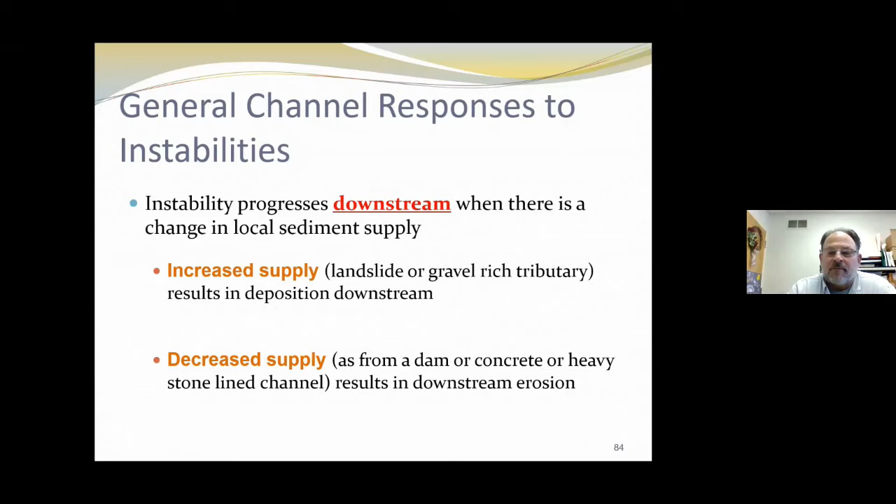We have the Tioga River that comes out of Pennsylvania and runs north to the city of Corning, and that stream, after a major rainstorm, runs at the top of bank for days after the heavy rains, because the dam's releasing it and won't release it high enough to go into the floodplain. So what happens with that extra flow for that many days, it saturates the banks, it picks up sediment because it's trying to slow down from the high water level, and it just creates a problem because it needs that sediment supply to slow itself down and create its channel.

So instability progresses upstream where there's a change in local channel or channel form. We're going to talk about incised channels, which result in stream bed erosion and upstream head cutting. That's basically if that dredging situation that Mike showed you is done in a stream, the stream has to react to that. It has to create a head cut to pick up material to bring down into that excavation area so that the channel can regrade itself, destabilizing itself. That's an incised channel. It can't reach its floodplain.

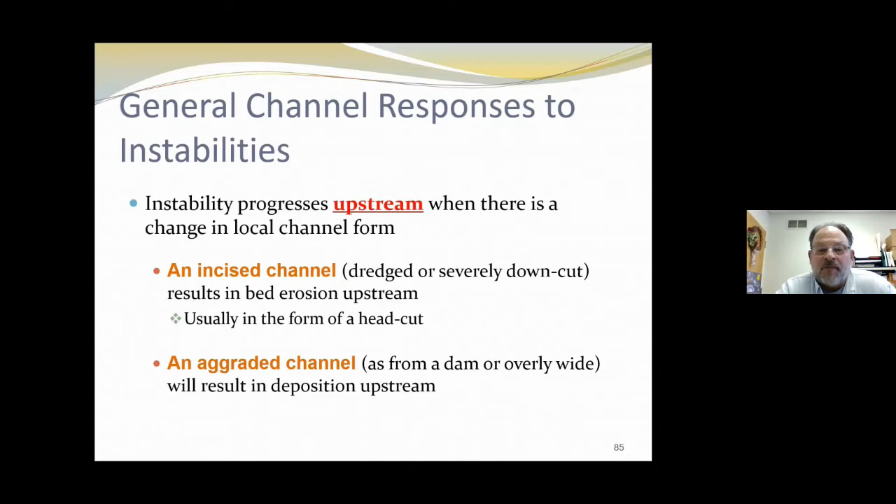An aggraded channel is from a dam, or over-widening will result in deposition upstream. So it's just about the opposite.

Incised channels: streams that cannot access their floodplain at bank full are said to be incised. That means that at their bank full depth elevation, they can't get out into a floodplain any longer. Therefore, their velocities and erosiveness are increased, much more so during a flooding event, which creates more instability on the channel itself because of the incision and the fact that it cannot access its bank full floodplain. So incised streams then are almost always unstable and very difficult to stabilize.

Yep, Jeff, if you don't mind me jumping in here - go right ahead, Mike. We need to look at the type of stream we're observing when we go in to evaluate it, because different streams engage their floodplain differently. So again, we need to take that into consideration when we're looking at incision.

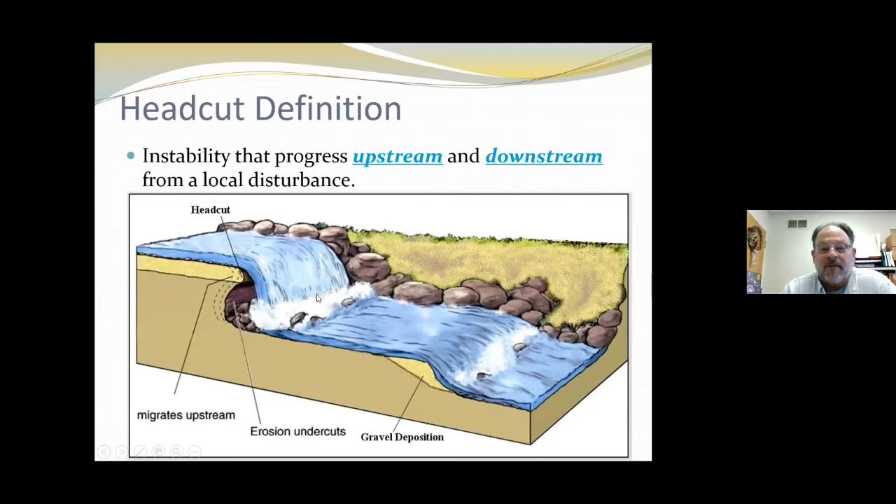Head cut definition: that's instability that progresses upstream, and downstream is where you get the deposition occurring. Generally it's from a local disturbance, either natural or man-made. You can see in the slide, we get the gravel deposition downstream. We're getting the stream head cutting as it migrates upstream, picking up that material and depositing it downstream.

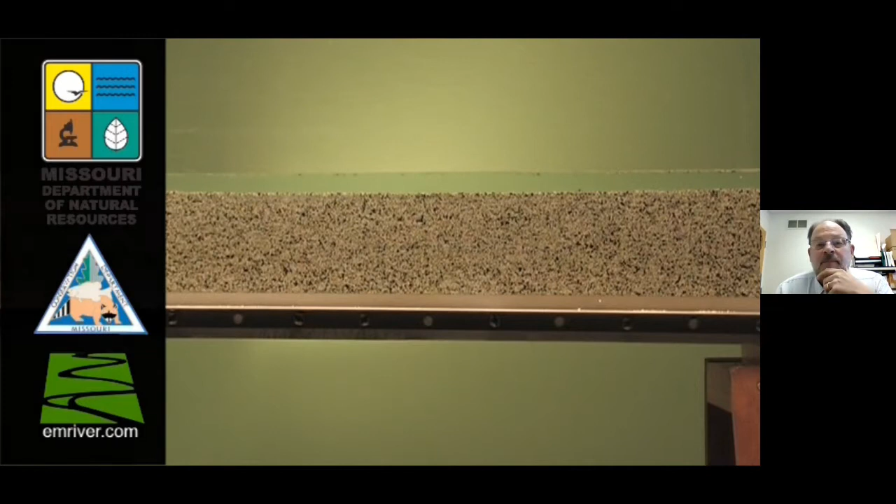So we have a stream table video of a head cut. You can see that this table's set up so that we have it on a slope and the water's flowing in this direction. And if we have some activity occur downstream, you can see how the profile begins to change as it picks up material, trying to fill that hole in. The stream tries to regrade itself, head cutting and filling, head cutting and filling.

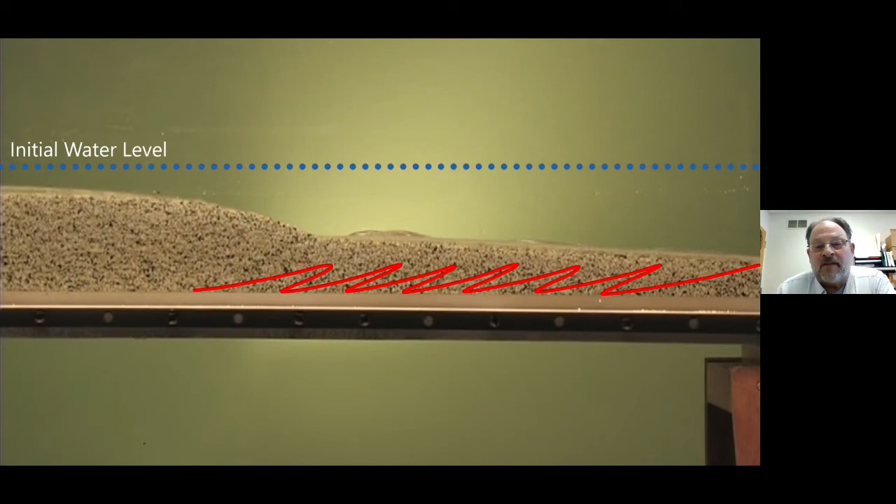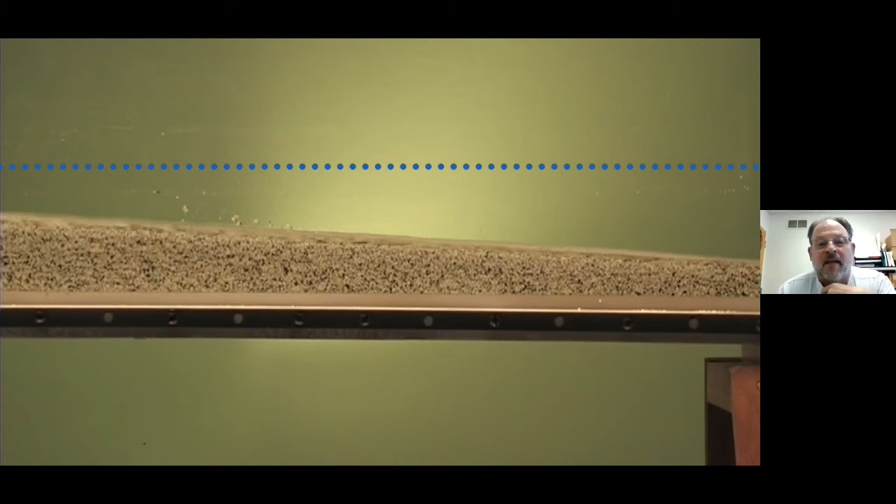So that's the profile, but as that stream head cuts and refills itself downstream, not only is the bed of the stream being affected, but these banks are also being affected. They're caving in because of the drop in elevation.

When you're working with avulsions, there's no need to go in there and do anything immediately, like dig it out or dredge it out, if there is no property or infrastructure that is in danger. The note here says we need to notify the municipality or the local soil and water district that there's an avulsion there, so we can make the proper decision on how to handle it.

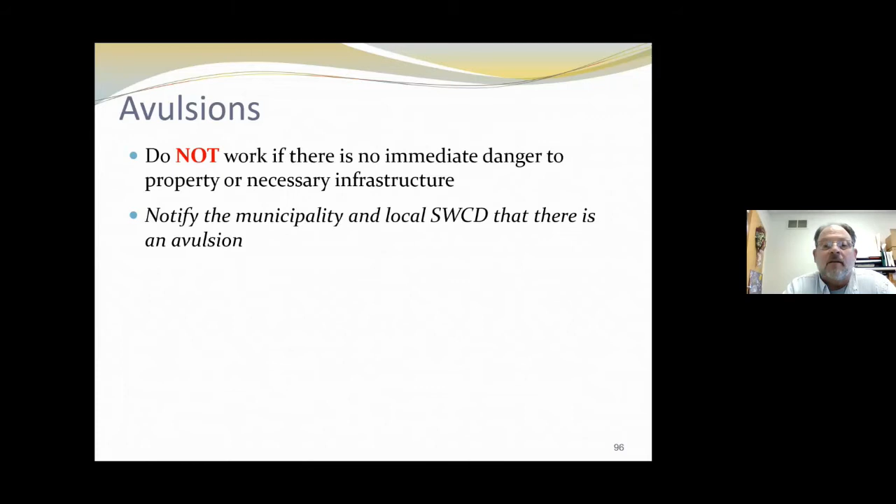So we do work on avulsions if the property or infrastructure is in danger. We're asking soil and water or the New York State DEC office for assistance. If the repairs have to be made immediately, we're bringing the new bank up to the same elevation as the existing ground, so the channel can access the floodplain in the future. We don't want to get it so deep that we're creating an incision again.

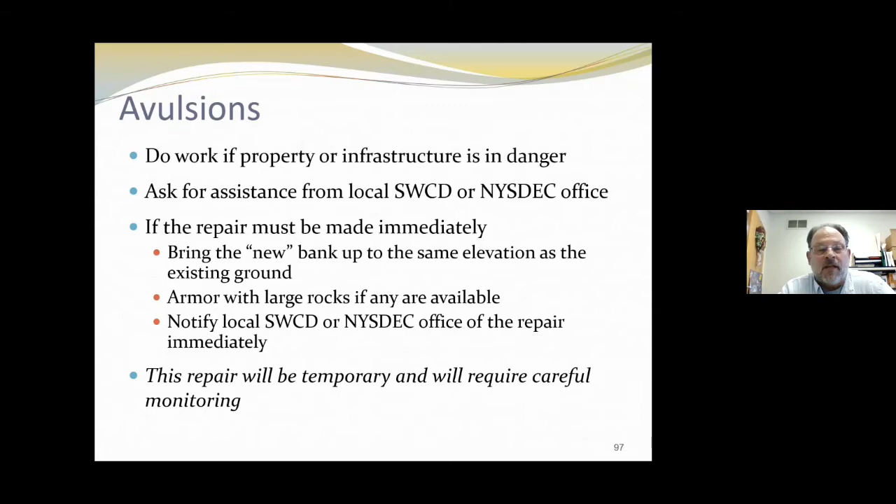Armor it with large rocks if some are available. Again, notify the DEC or soil and water conservation districts of repairs immediately. Generally speaking, those types of repairs are going to have to be monitored so that we can make a decision on how to stabilize that area in the future, or whether there should be a change in that project.

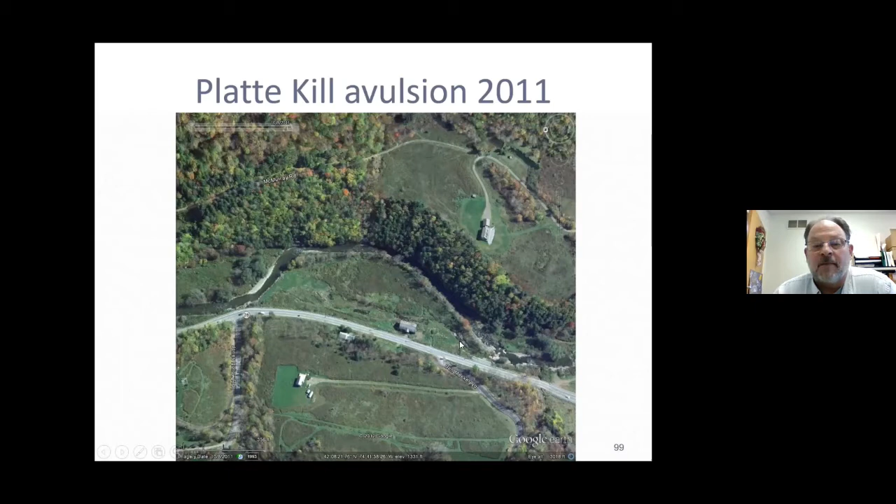And this is what they did. Notice it's 2011, so this is a couple years after the issue was created. A plan was put together where they blocked off the new channel that was developed by the avulsion, cleaned the avulsion out, and basically let it run down through the original channel. So they protected the barn, the road, and they stopped the erosion or head cut that might have been coming up this valley.

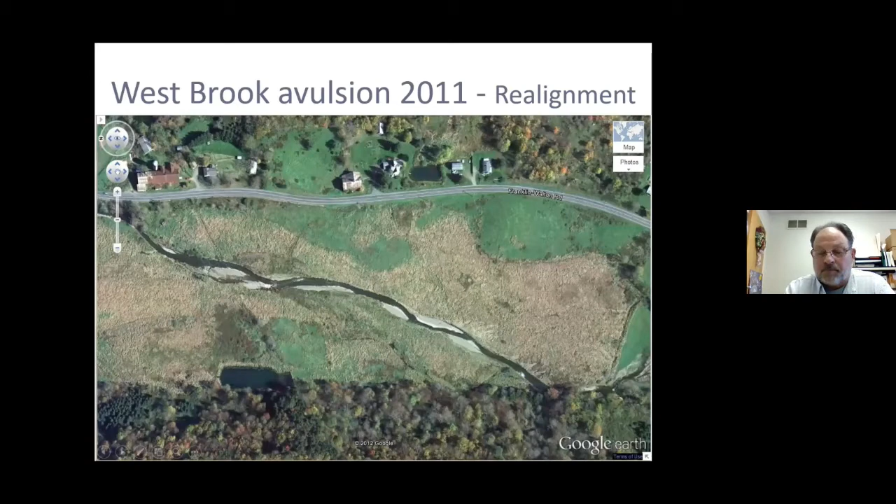Okay, we're going to move into flood response. Basically, this is the emergency stream intervention program. A lot of this program came out of flood responses in the past, where contractors and municipalities were rushing into projects without really knowing what to do with the channel or how to handle it, or just going in and wholesale cleaning some areas. This program is assisting in coming up with a new process to deal with such situations in the future.

So when we have a flood response, we need to prioritize the items that we need to address. We figure out the higher priority stuff, the higher priority damages, do an assessment, and go in and do a repair and document whatever is needed in the future for repairs. During an emergency, we're just trying to do the immediate stuff first, the stuff where facilities, infrastructure, roads, bridges, or culverts could allow or prevent the loss of life and protect the general public. That's what we're looking at immediately when we get into the first flood response.

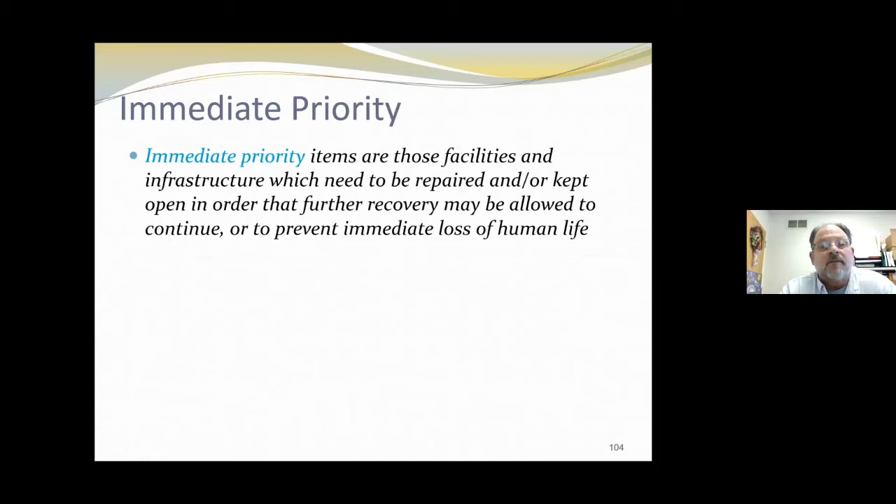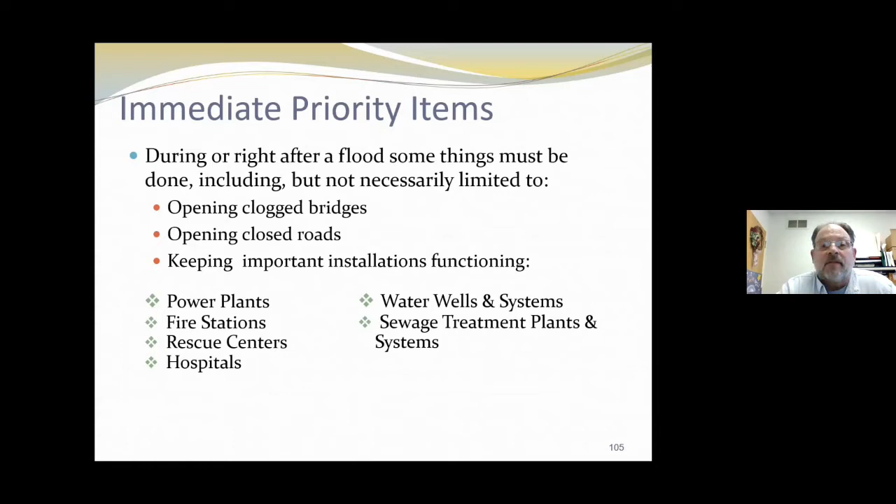So right after a flood, what do we need to do? We certainly need to open up clogged bridges, open closed roads. We need to keep important installations functioning, such as power systems, power plants, fire stations, hospitals, water well systems, sewage treatment plants, and that sort of thing. So those are more of the high priority items that we need to look at.

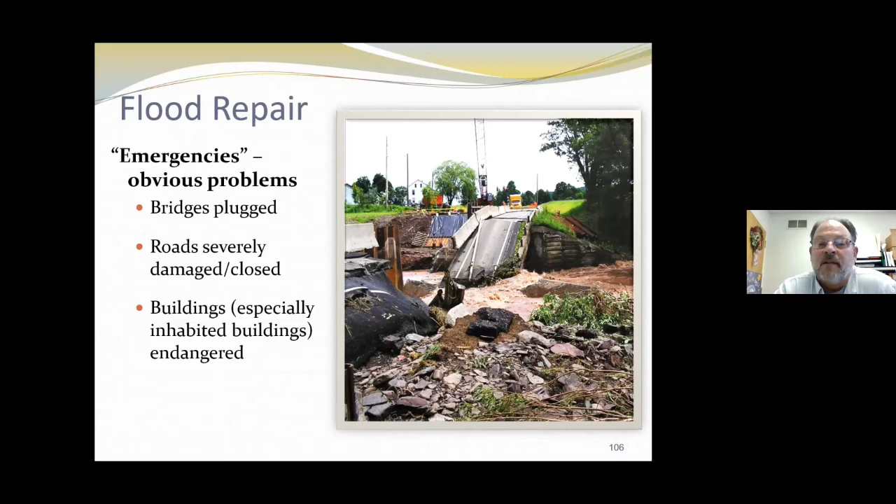For example, here, this is an emergency observation. This bridge has pretty much been decimated by the flood, probably plugged with debris, and water ran over the road and washed out the entire structure. So this structure is going to take a little bit more design and more effort to get the road back open again. In an emergency situation, this is where you're looking at emergency action right away, to get road closures done, so you can come up with a plan on how to address the future repairs of this site. So, high priority items are necessary for the first part of the cleanup process.

Like I said, this course concentrates on getting channels back into some acceptable condition, something we can live with, something that doesn't damage the stream system both upstream and downstream. We just need to open up those clogged channels from debris and that sort of thing. We need to get those channels back into place, stabilize the active eroding stream banks, and see if we need to work on stabilizing any landslides that occurred. We need to get the channel to a condition so that the natural processes of stream morphology can begin to return it to its natural state.

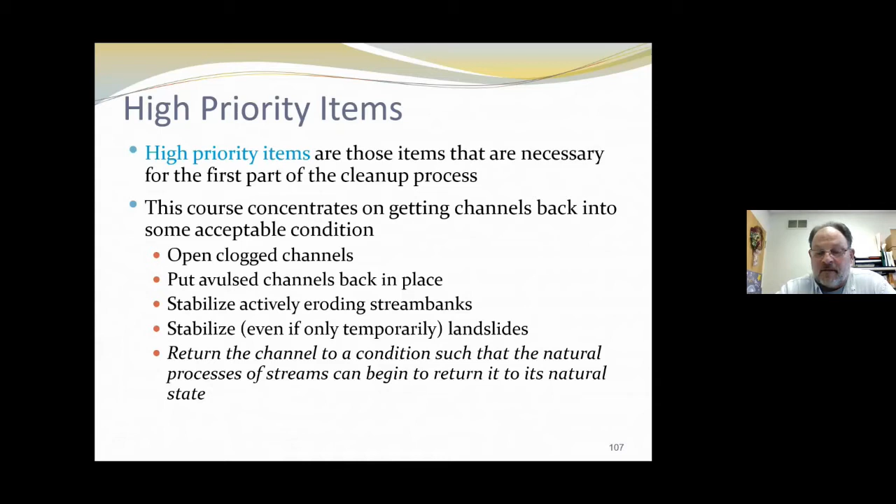We don't want to over excavate, we don't want to over dredge. We want to do it in a means where we can allow that stream to heal itself up in the future.

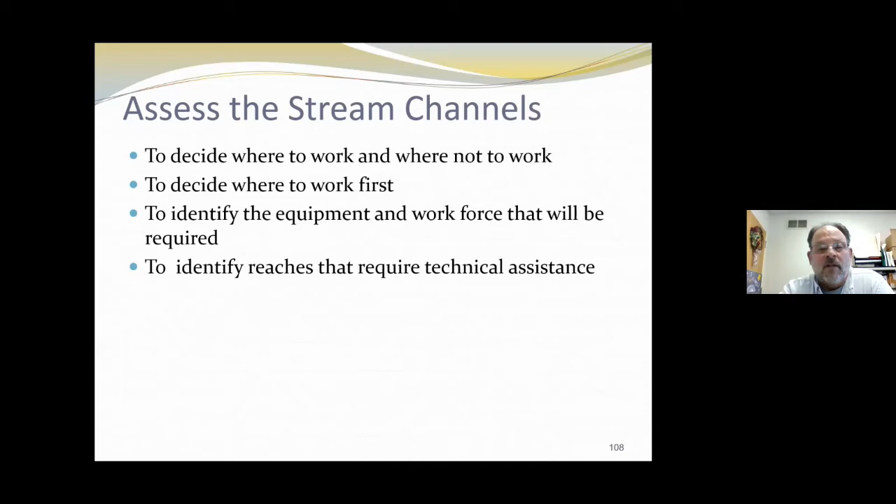So, we need to assess stream channels. We need to decide where we're going to work first, what we're going to do. We need to figure out the equipment or workforce needed to get that project done. And we need to identify reaches that are going to require some technical assistance, either through the Soil and Water Conservation Districts, DEC, or some other agency.

So we need to work on actively eroding high banks, eroded banks that are heading towards infrastructure or homes. We need to look at areas with high sedimentation load, where other small floods might cause an issue or make the bank even worse or impact infrastructure. Basically, channel blockages, debris at culverts, revetment, undermining, and impaired channel capacity, so that a lesser stream flow during a flooding issue would be worse.

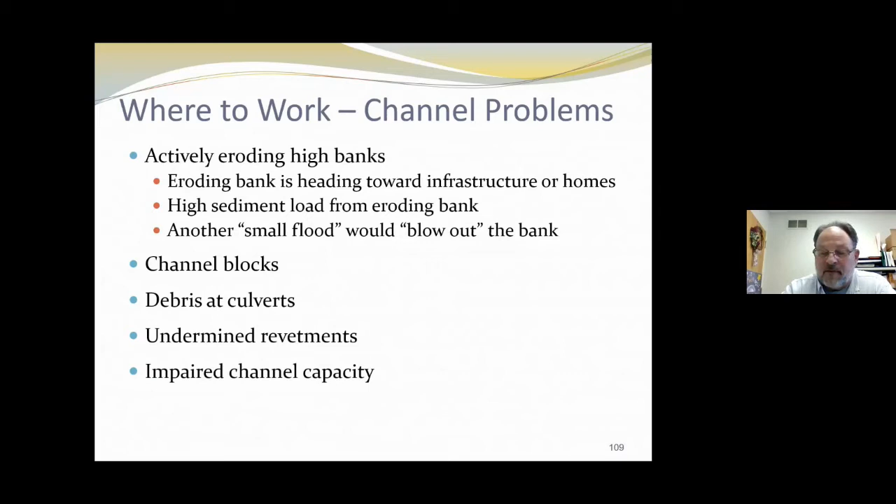So here's a slide showing an actively eroding bank. If we have a bank that's close to a garage but there doesn't seem to be any... I'm not sure where the house is, probably downstream past that tree we see on the right. But is there immediate danger of this creating damage to infrastructure or life and limb?

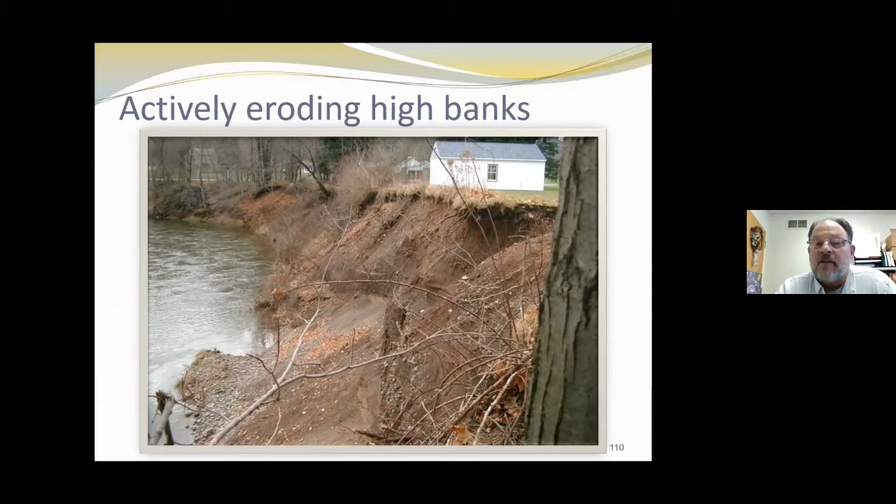By the looks of the size of that stream system and the type of material in that bank, it's probably an active eroding area, and it needs to be addressed. But I think this one's going to take more time than just going in and opening up a channel or taking out a clog or debris jam. This one's going to take some design work and serious calculations, and it's going to cost some money to repair.

Channel blockages. This is a good example of a debris jam that has created a deposition load just upstream. This could definitely cause problems and reroute this stream if the deposition isn't removed in a timely manner.

And we have to remember that when we go in to do these things, we have to try to get that channel back to some sort of stable slope. We have to take some survey information to figure out where we need to excavate to, and not get overzealous with it. But sometimes these areas will actually heal themselves up if you just get the debris out of the way.

Jeff, if you don't mind me jumping in here, on a site like this, one of the things you want to consider is all that sediment behind that blockage we see in the channel. Sometimes what's going to happen, what we need to consider, is if we remove that woody blockage, all that sediment flows downstream and causes problems downstream.

The other thing you might want to consider is sometimes that woody blockage is an enhancement, because it starts to address the incision of that channel. It starts to block sediment up, so the channel above that blockage is re-engaged with the floodplain. So you need to look at some of these situations carefully, and not just jump in there and start ripping and tearing just because you think it needs to be done.

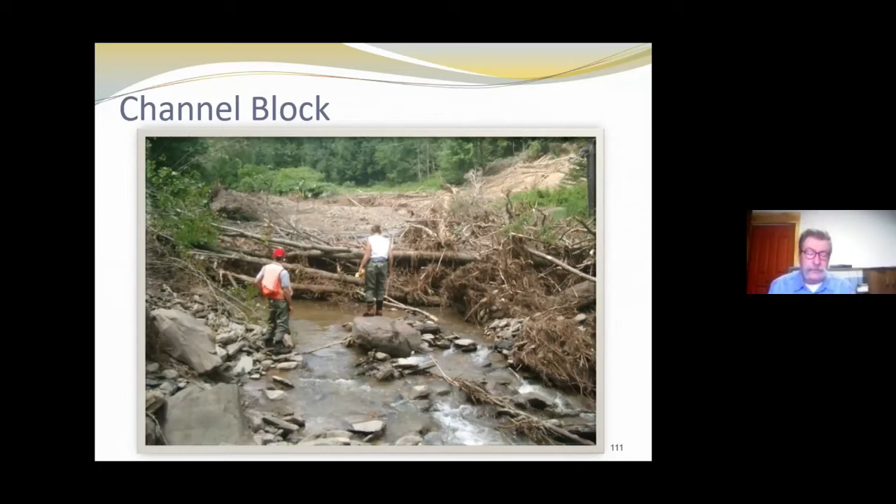Debris at culverts. There's a scenario of a plugged culvert with debris. We've got some issues there, with the town road. We've got quite a bit of damage to the infrastructure. So we're going to get this channel opened up so we can get the flows going through again. This is definitely an area that's probably a high priority for the township.

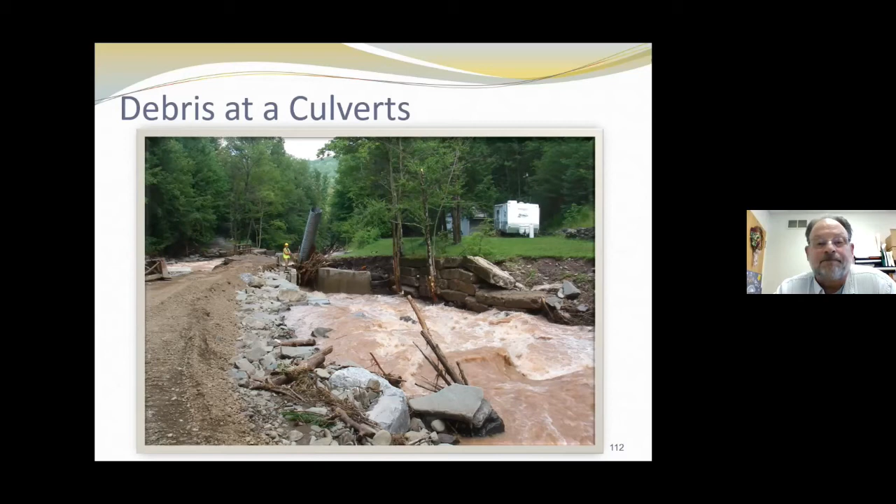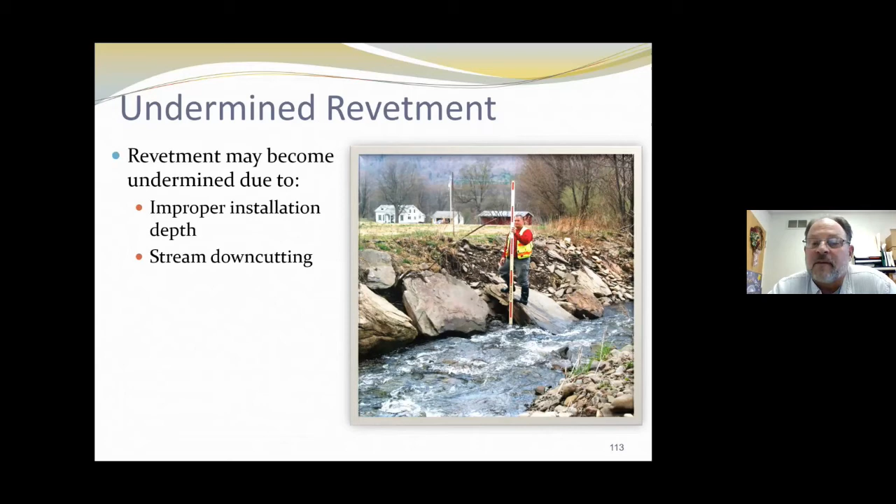Undermined revetments. This is an example of some riprap that was placed on the bank, and after the storm event, it evidently cut itself down deeper and undercut the toe of that stone, and it just slid down the bank a little bit. Whether or not this is an immediate emergency is to be seen, but this is some of the issues you have to document, because you will probably have to make repairs to something like this in the future.

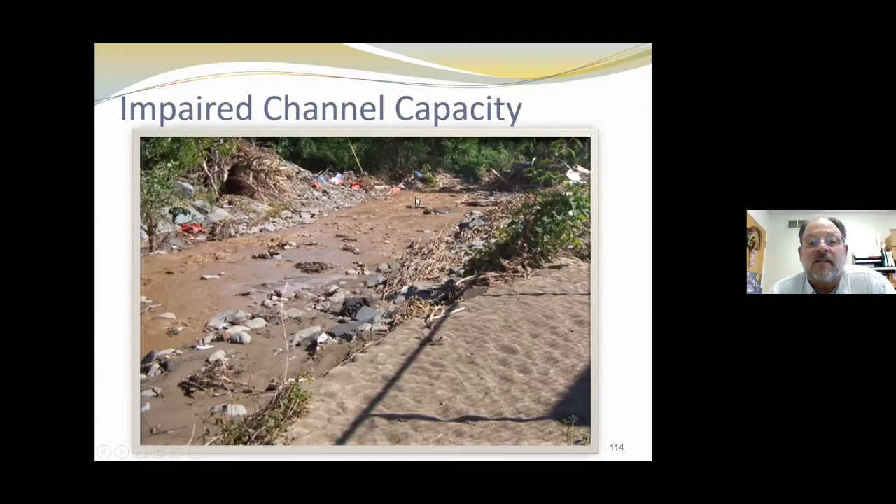Impaired channel, deposition in a channel. It looks like there was quite a bit of debris that got packed up in this channel and created deposition in this area, which basically filled the channel in, so that anytime we get a smaller storm event, this floodplain is going to be activated at a lesser storm, and it's going to create problems downstream. You can notice how this floodplain has collected quite a bit of fine material, so the velocities must have been quite low through here at the time of the flood. They just need to get the channel reconnected through that reach.

So where not to work? Okay, the channel's dimensions seem to be okay, and there's little damage around. We don't need to be messing around with that. If the banks are relatively stable, we don't need to be putting that on a high priority list.

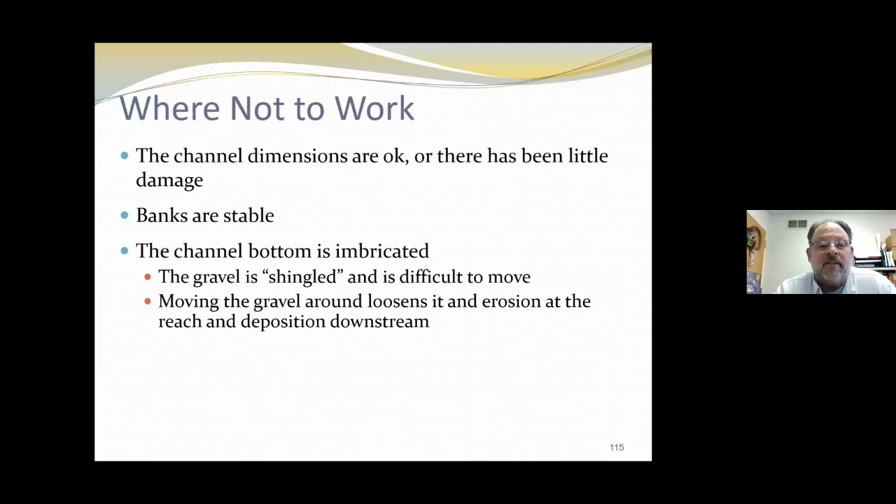If the channel bottom's imbricated - imbrication is the nature's way of packing the gravel in a shingled manner - it's probably very, very little erosive, because it's packed in there by Mother Nature. It takes a lot of energy to move that. Once we start moving that around, we loosen up that natural imbrication, and then that material will mobilize itself at a much quicker or lesser velocity rate. It'll mobilize. Here's a photo showing after a storm event how that material is laid in there by Mother Nature.

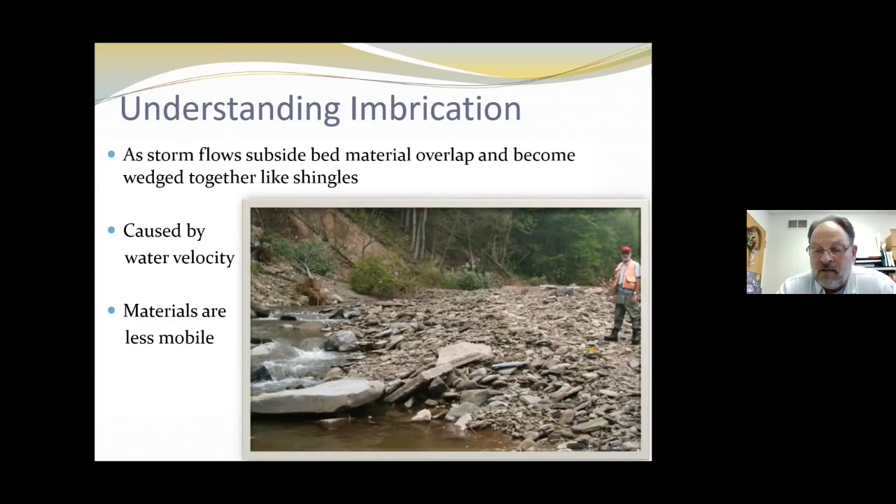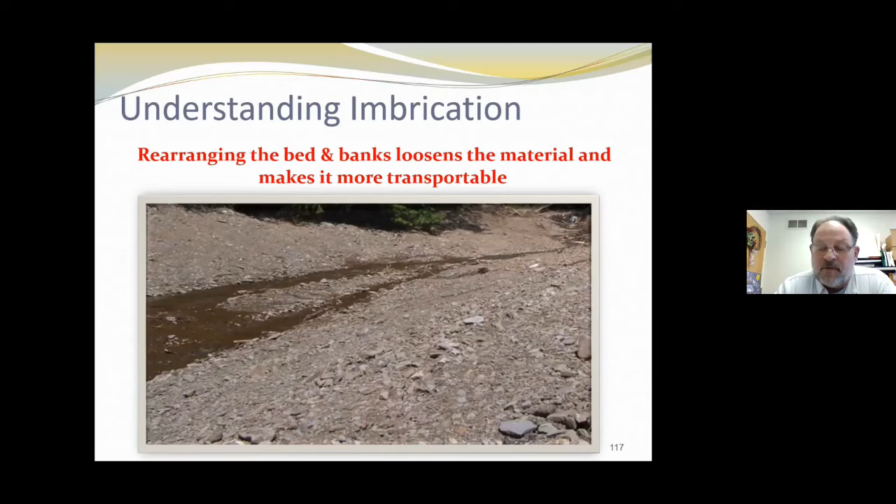That's caused by the velocity of the water, and the stones, as you can see, are wedged together like shingles. Basically that material in that channel right now is less mobile than you could make with any construction or using any equipment in. So once we rearrange the bed and banks, we loosen that material up. All that shingled larger stone that was on the surface has kind of disappeared, and the fines have come up into it. This material is much more transportable than before, when it was all imbricated by Mother Nature.

Caution has to be used on those steep streams. Slopes over 4% - the stream's probably one of those step pool systems we showed earlier, where the channel itself has steps in it, like mini natural check dams, to help stabilize itself. If we remove those areas, we're going to ask for trouble and definitely have some serious head cutting, and we could actually start destabilizing banks if we do the wrong thing on those steep streams.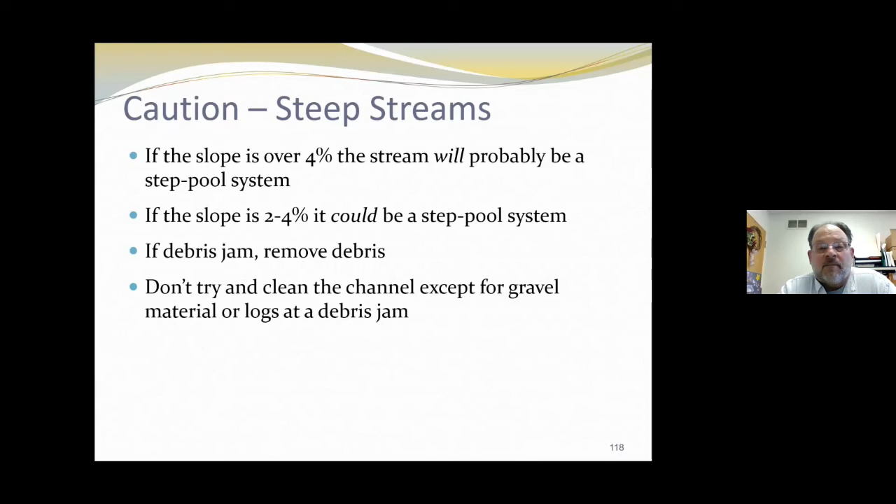If the slope's 2 to 4%, it could be a step pool type system, and we just need to know there's different ways of dealing with that stream system than with the pool riffle system. In this steep stream, if a debris jam is there, we just need to remove the debris jam, not the gravel or stones, unless we absolutely have to. Generally in those streams, you won't see a lot of gravel deposition unless it's a huge debris jam.

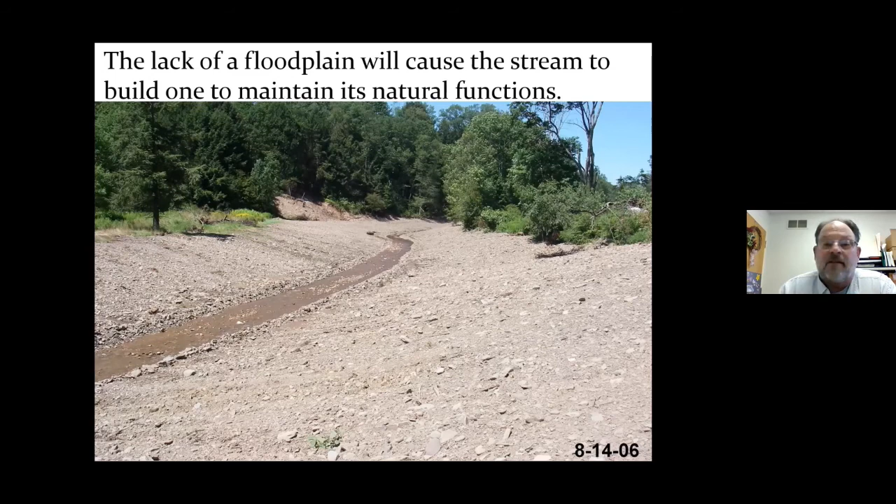So the lack of floodplain is going to cause a stream to build one to maintain its natural functions, and that's what it's doing. For two months after the work was done, you can see how the channel is beginning to meander, re-meander itself.

So you can see how the stream wants to get back over to where it was originally. There's where the toe of that landslide was, or failure. It's going to continue to move in that direction until it gets back to its natural meander pattern. This is only four months after the work was done.

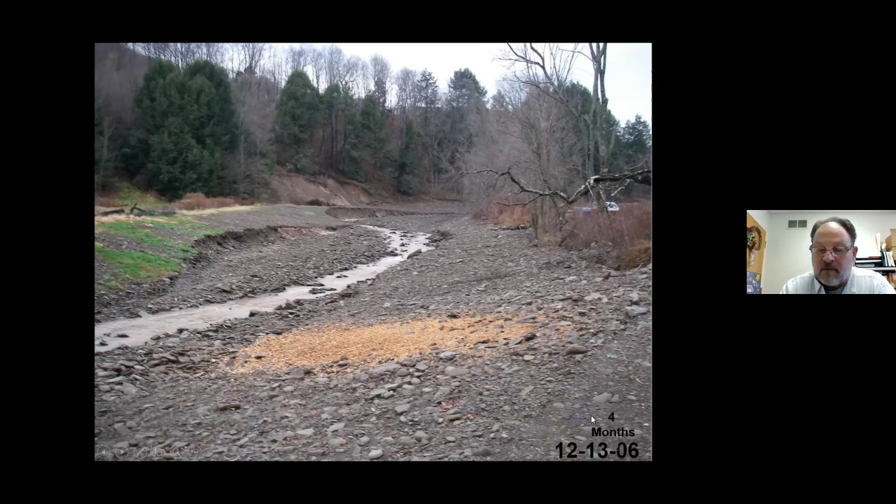So all that effort and work with all that bulldozing—really, if we had left it alone for a little longer, let's see what the channel would have done. We could have made some better decisions and made some efforts to do something a little different.

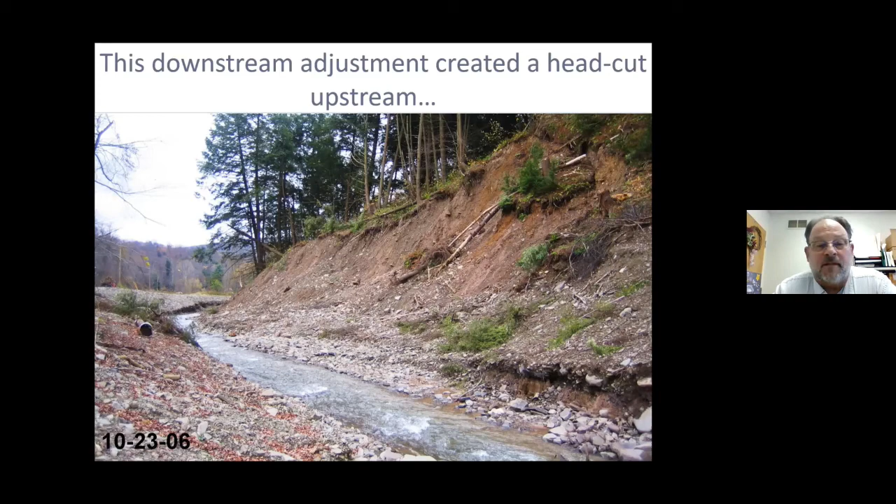So that was the downstream adjustment. According to this slide, it has made a head cut that came upstream. You can see how the head cut has been working its way up the channel, and that's going to destabilize these banks over here because it's probably getting deeper than it was originally. We just need to be very careful about slope on these streams when we're working in them.

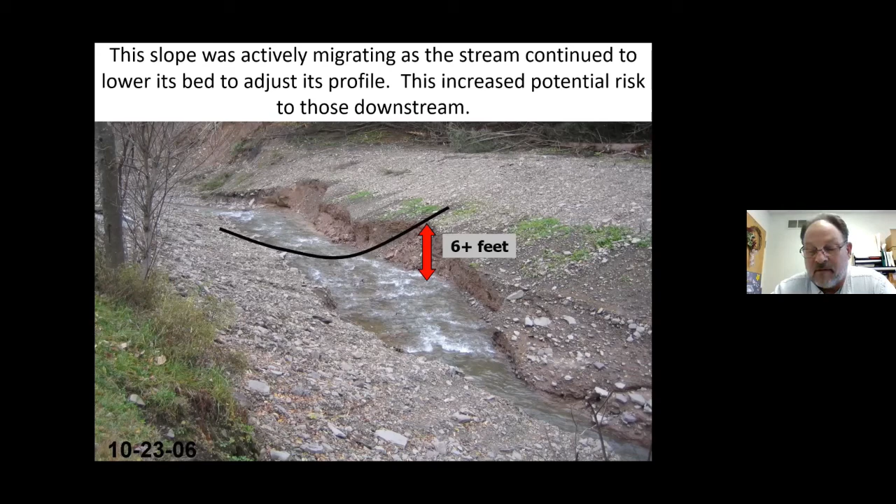So the stream continues to lower its bed so it can get back to a stable slope again, and you can see that we're looking at almost 6 feet of scour along the toe of this stream bank here from the activities we did from channel straightening downstream. This material, once it's mobilized and moves itself downstream, it actually probably is plugging culverts and bridges downstream or depositing somewhere downstream and causing problems.

So post-flood work—improper post-flood work—can negatively affect the stream function, the stream stability, of course the aquatic habitat, and that goes right along with the water quality. And it costs a lot of money for the local resources to keep going in and maintaining structures downstream that may be impacted from this activity. So that's something we need to look for.

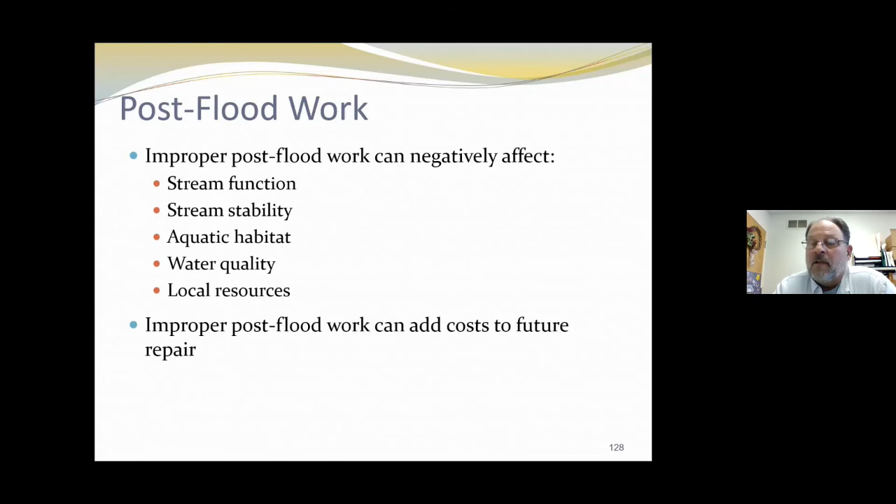And then we have to address the situation with, well, what do we do in the future? Do we need to do future repairs so that we can slow down the erosion now that we have to deal with? So it can get quite costly if we don't do the proper immediate flood work.

So an itemization sheet was developed by Delaware County Soil and Water Conservation District, and we have a training manual. We'll bring that slide up, basically to help us document the information from the field so that we can prioritize it when we get it back to the office or whatever.

We're using one sheet for each stream reach. We're checking off the problems, adding notes, doing a sketch. We can change this information if we need to, and for sure we need to take photos at all of these sites right directly after the emergency has occurred, because they're going to help us with the permitting.

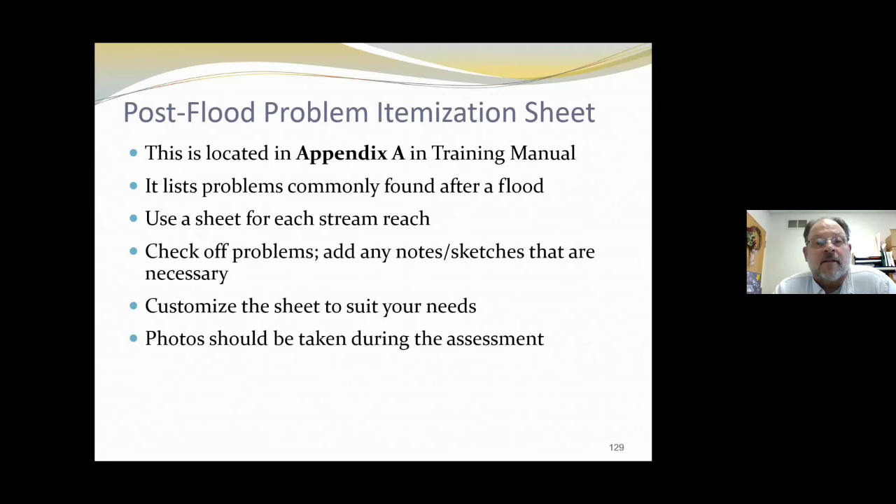They're going to help us make decisions on where to work, where not to work, that sort of thing. It'll assist the municipality greatly. So the advantages are we can identify the location, the number, the different types of problems that we have on each reach. It can help us decide which are the most severely impacted reaches so that we can make decisions on where to prioritize our work in the near future.

And then we can determine the manpower that's needed for the job, whether it's removing woody debris and we need chainsaws and laborers, and what type of equipment needs we need to have out there, whether it's excavators or front end loaders or trucks to haul debris away.

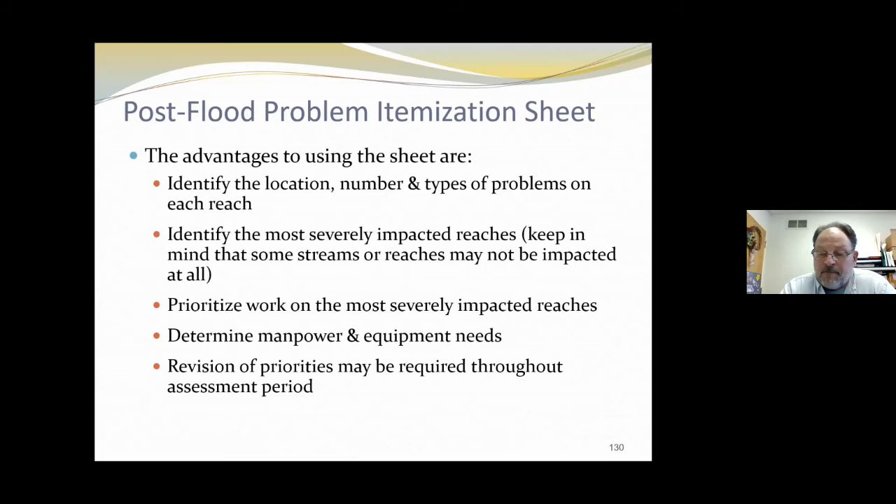We can always revise our priorities as we move through the assessment process. Again, these sheets can be saved as a record to document what work was done, just in case we're looking at maybe a FEMA disaster where we could be receiving state or federal reimbursements for some of the work that we had completed.

Generally, most of those disaster declarations do not occur for many weeks or even months after the disaster has occurred. That's why it's good to have this as a record. And you can document this stuff for permitting reasons too, for the permit applications if needed, or if it's an emergency permit, then you've got that documentation already established.

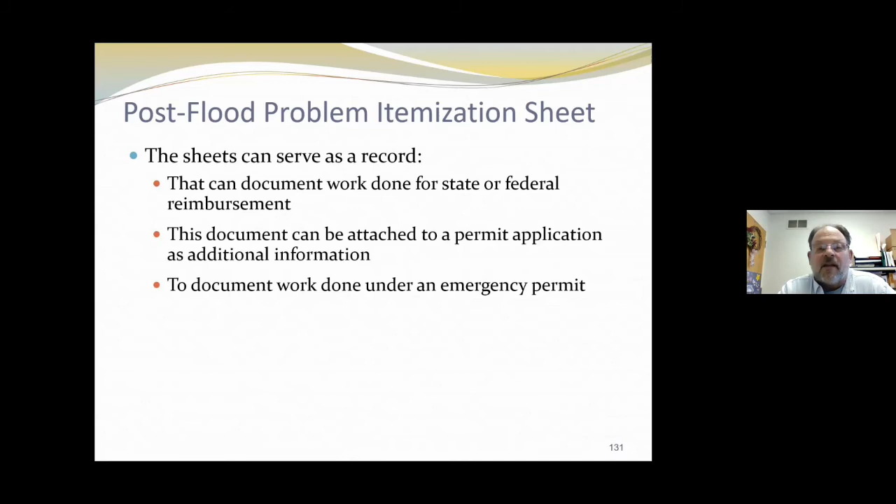Here's an example of the Platte Kill site that we looked at, the avulsion that occurred. They quickly put together a sketch plan of what they were going to do, and change the avulsion so that they could put it back in the old channel. They had debris at culverts, and they had scour at the culvert. They had a mass failure, avulsion. We know they had the avulsion that occurred. So all this stuff was documented.

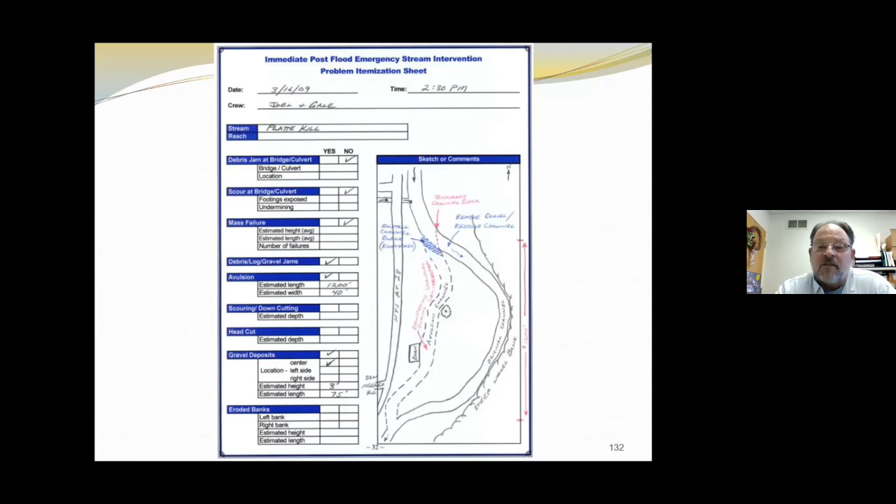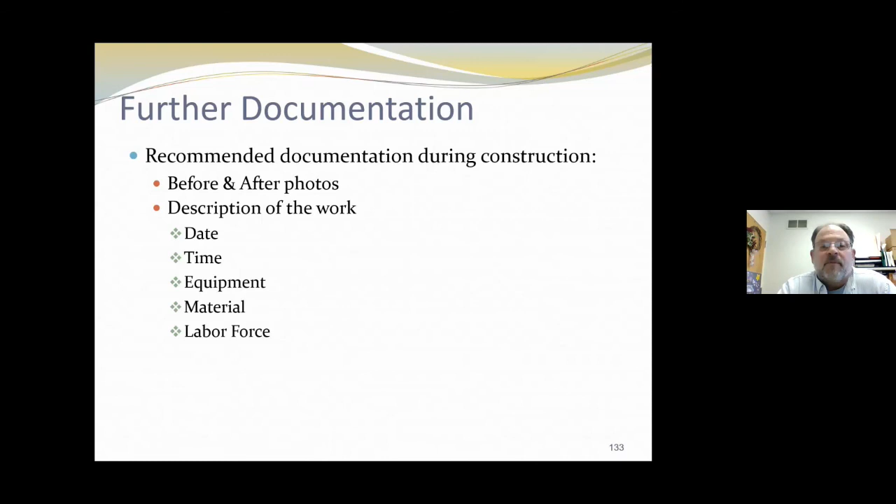Documented gravel deposits. They got an estimated height and length of what the deposition was in the sketch plan. So again, before and after photos, very important. Description of the work that was completed needs to be written up. Of course, you need to take time and write down the days you worked, the time you worked, the type of equipment, the material, your labor force. So all that stuff can be figured out for a cost in the future.

Post-construction review, we need to go back and look at it and see if the work was performed properly, especially if we had a permit involved, if it was completed, if it met the needs of the identified projects on the itemization sheets. And you can always contact the Soil and Water District and New York State DEC offices for assistance with future vegetation, structures, and long-term monitoring of those sites if need be.

Jeff, if I could, Mike. Yep, just a reinforcement of that itemization sheet or site sheet. I've worked with a lot of different agencies, the Natural Resources Conservation Service, FEMA, state agencies. It doesn't hurt at some point to get together with all of those folks, everybody collecting the same information, because in times of a flood or emergency, everybody scrambles in every direction, and there's people crossing each other's path. So if everyone's collecting that same information and it can be shared, that's a real advantage and a real work saver. That's worth putting some thought into.

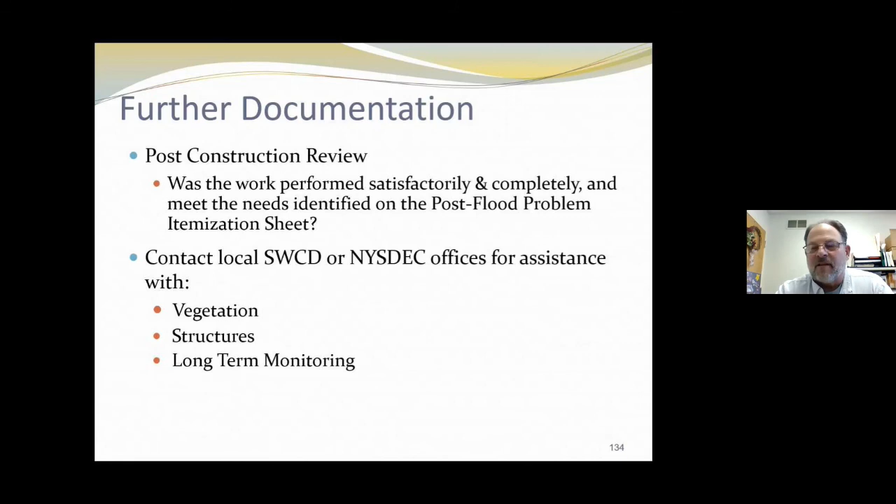And wasn't there estimates of nearly 80 sites being approved in one day? Yeah, that we heard. I remember myself doing emergency permits on certain sites, and we were allowed at that time to do the permits right on site. I remember doing like 27 myself in one day, because I had the photos and the drawings and the documentation that I could staple all together and submit them at a later date. Wonderful.